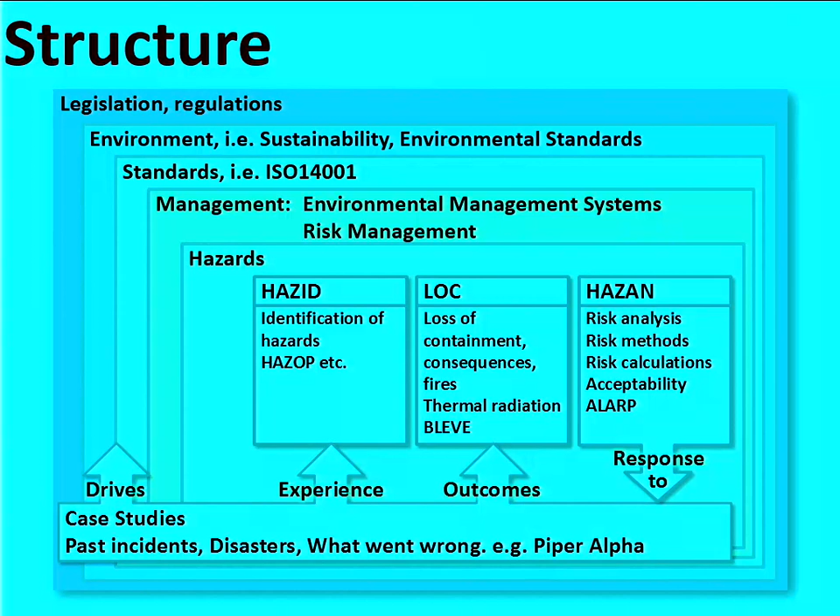Best thing we can do. So that's an overall picture of the structure of this module. The assessment: we will do an in-course assessment on HAZOP, hazard and operability. I'll give you a lecture on HAZOP. We'll then do a workshop on HAZOP. I'll put you in groups and you go away and do a HAZOP study on a little system that we have, and then we'll assess it.

The assessment for this is usually, we get the group in a room and we talk to the group for half an hour and try and see how much you understand about the HAZOP principle and what you've found in the little system that we give you, and you will get a mark for that. Don't be nervous about it, it's really quite straightforward, and most groups usually do quite well. And that's worth 20% of this module.

Then at the end of the semester you will get a 2-hour exam, and that's worth 80% of the module. Now I've got this from last year. I think Sue's got the same format this year. The exam format is you get one question at the very start which is compulsory, and then for the remaining 3 questions you just need to answer 2 out of 3. So that's the way the exam's organised. But don't worry too much about that at the moment. We'll tell you more about that when we get towards the exams at the end of this semester.

It's no big deal. Right, so that's the basic gears of the module, just to give you an idea of what it's all about. We thought it's best to give you an introduction at the very head of the module, because quite simply you have so many people that come and give you lectures, it can be quite hard to put the picture together. So what I've tried to do there with those few slides is to just give you a feel for what this module is all about. And in just one short module, it is quite comprehensive. We do quite a lot of work in it. Okay.

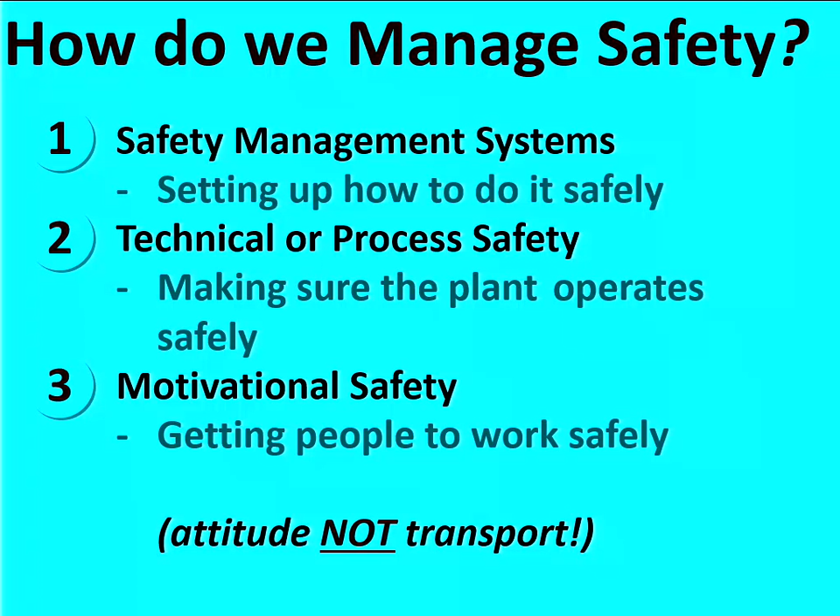It's actually getting people to think and act safe, but understand why they're doing it. They're not just ticking boxes because the boss says you've got to tick those boxes. They're ticking boxes because they understand why someone's doing it. So it's actually quite a key aspect. Fair enough, management systems, fair enough, process safety, yeah, absolutely. But also the key third part of that is the people involved. They are key. If the people involved are not doing it properly, you can have as many management systems and as many technical or process safety methods out there, they just won't be any good. You really need motivational safety as well.

So have a look at safety management first. Well, this is done from a UK point of view because that's the only one I know, but in general terms, the basic principles will apply to most countries. So if you're not from the UK or if you're not from Europe, please bear with me. Have a look at the basic way these things are done.

Now, management systems are about defining safety policy, setting the standards, targets. So you're all writing notes, that's good. I've actually put this stuff on Blackboard as well if you want to copy. So setting safety standards and targets, setting up how you do things, the methods, the procedures, the systems of work,

monitoring the effectiveness. So there's no point in just setting things up and just hoping everybody follows it. You've basically got to watch as well. So do an audit, do a check, make sure everybody's actually doing what you've said they should be doing. So compliance, monitoring, effectiveness.

And also in the UK, what we have to do, and we do it all over the place, this building included, is we meet the requirements of what's known as the Health and Safety at Work Act 1974, or HASAWA for short. I'm fortunately, or unfortunately, old enough to remember when this came in, and it was a big change. Before the Health and Safety at Work Act, there were lots of different little safety rules and everything.

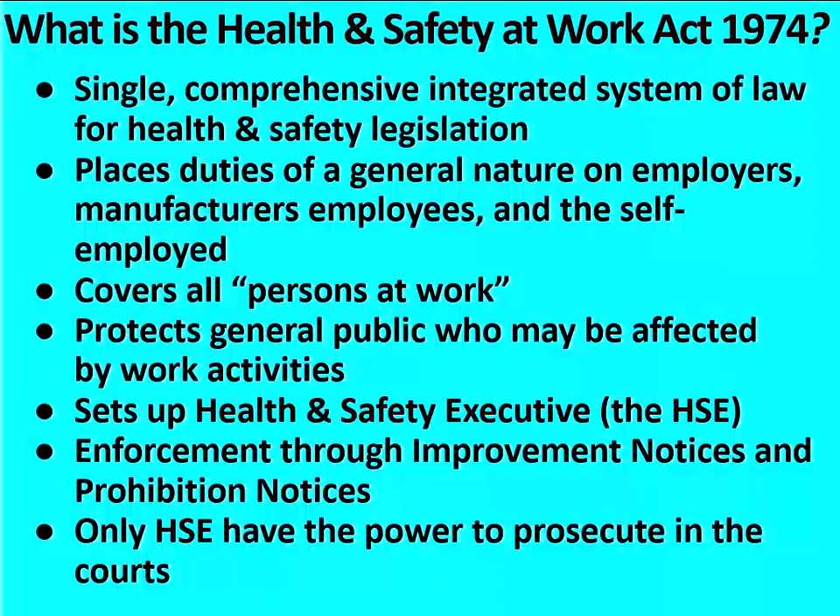So, what's the most important part of the HASAWA? Section 2. There's various sections in it; well, you know, it's a piece of legislation, so it's very big, it's very wordy, it's very difficult to read. I don't think I've read through it. But there's an important point there, and there's actually an important phrase in there as well.

It says, it shall be the duty of every employer, that's the bosses, to ensure, and then I've underlined this bit, so far as is reasonably practicable. It's important, that. The health, safety and welfare at work of all his employees. Well, it was written in 1974, they would have said his or her employees nowadays, but that's what it's doing there.

In plain English, in section 2, it's saying that it is the duty of every employer to ensure the health, safety and welfare at work of all their employees. There it is, in law. It says so far as is reasonably practicable because it understands the fact that no matter how many measures you take, there will always still be accidents, unfortunately. So it puts that practical limit in.

What you have to do as an employer, and you'll see later on as an employee, is you must take all reasonable steps to make sure. So the reason for having those words there is, okay, you can take all the reasonable steps to make sure that there's no accidents, but there will still be some accidents.

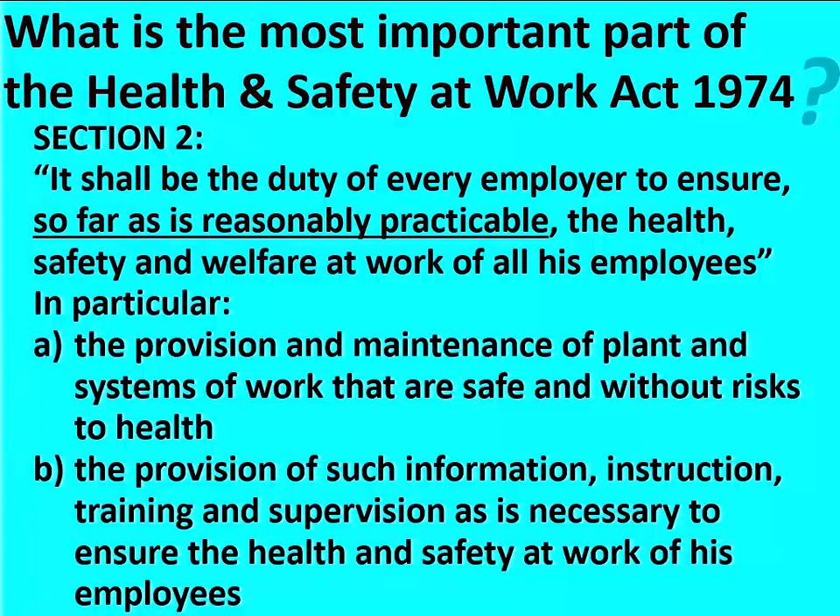So there you go, there's the slide. Should have put the slide up when I was explaining that.

So far as is reasonably practicable, it's actually an interpretation based on case law. So it says the cost of further reducing the risk must be grossly disproportionate, i.e. out of proportion to the risk itself. So how far do you go to get rid of risk? As long as you've taken reasonable steps, that's acceptable. But if it becomes disproportionate, well, you drive everybody out of business, so there'd be no point to it.

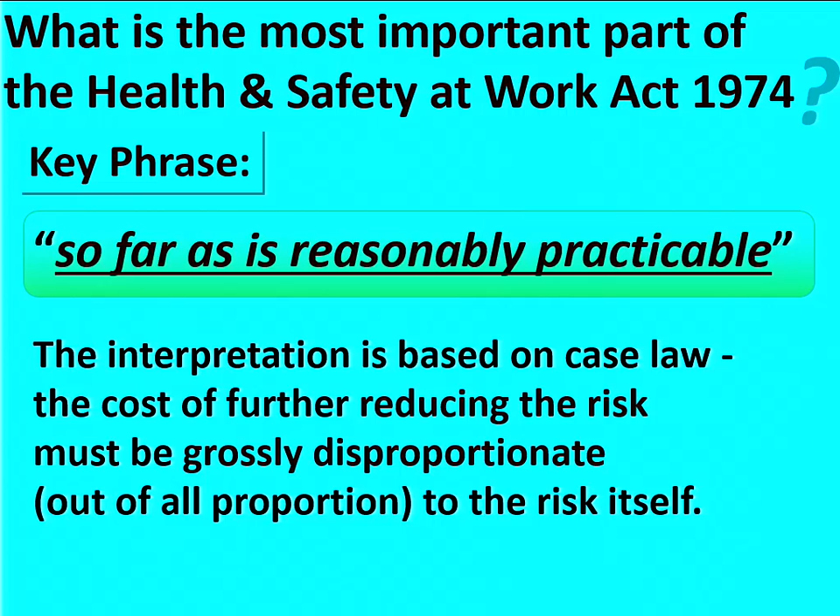What is ALARP? Now this crops up on a regular basis in all safety, all aspects of safety. And it's actually got its own acronym now, ALARP. And what it stands for is as low as reasonably practicable. And that's quite an important one to understand. Right? As low as reasonably practicable.

And the concept of reasonably practicable lies at the heart of the British health and safety system, and of course it's a key part of the general duties of health and safety at work. So what it means is that a risk has been reduced ALARP, as low as reasonably practicable. It's about weighing the risk against the sacrifice needed to further reduce it.

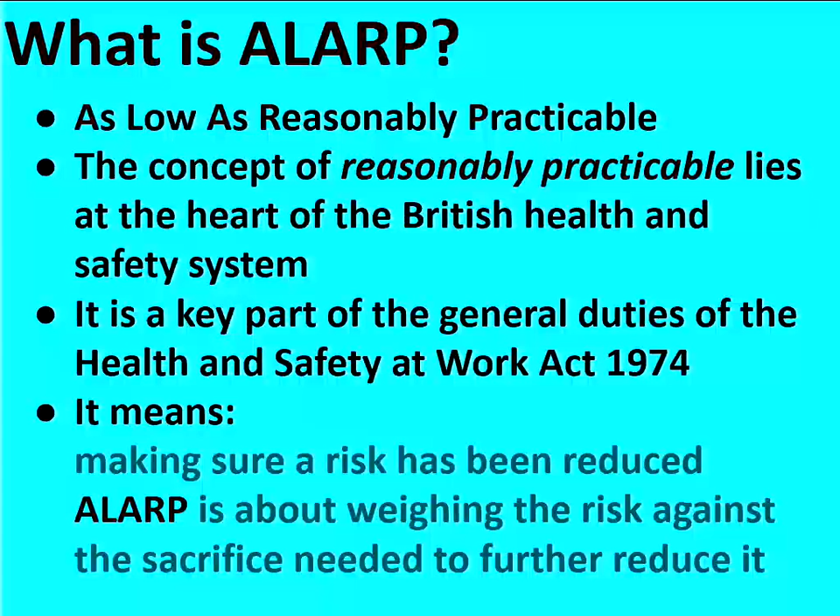So this is what I've said, I'll say it for a third time. You've taken all reasonable steps to reduce risk, and you've actually pushed it as far as you can, but the next step would just be impracticable. And as long as you can prove that to the HSE, you've done your duty.

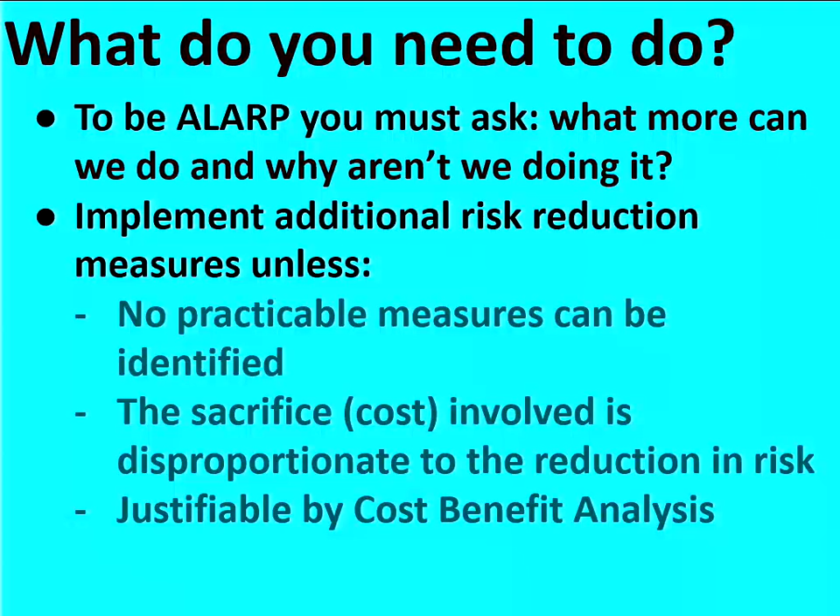Okay, management of safety. Technical or process safety. Well, like I mentioned before, LOC, loss of containment, is usually the core reason for any incident. So this technical or process safety is involved in preventing plants from releasing their hazardous contents. And you do that by good design, good construction, and good operation.

You must also understand how potential major accidents can happen, and if they do, what the consequences are going to be. Now, any really good person who's well into this sort of thing should know how major accidents occur. And if a major accident does occur, what's going to happen? If you don't do that, you shouldn't really be in charge of heavy machinery, should you?

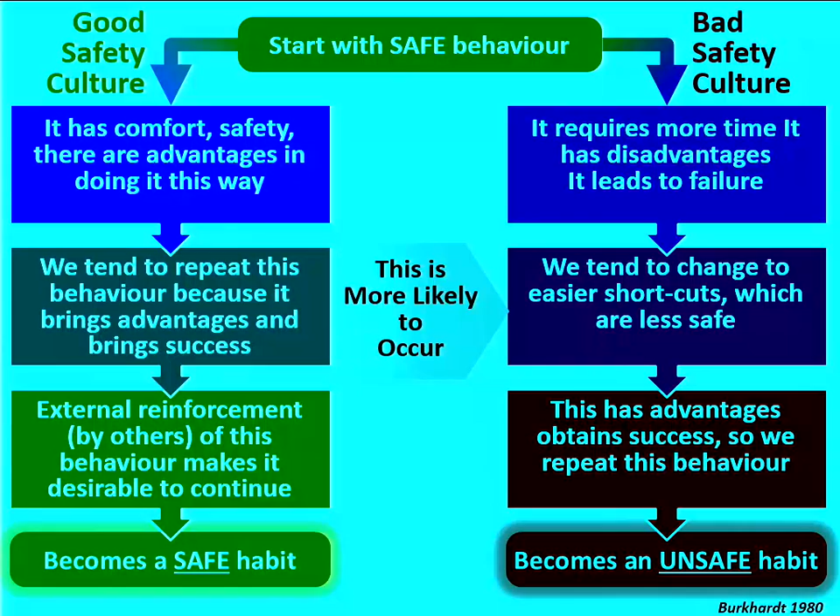Something happens, you think, goodness, yeah, there was an explosion, but I was going to walk past there. If I'd been there as the explosion happened, I would have been killed. I feel really, really nasty about that. You know, I don't feel good about it.

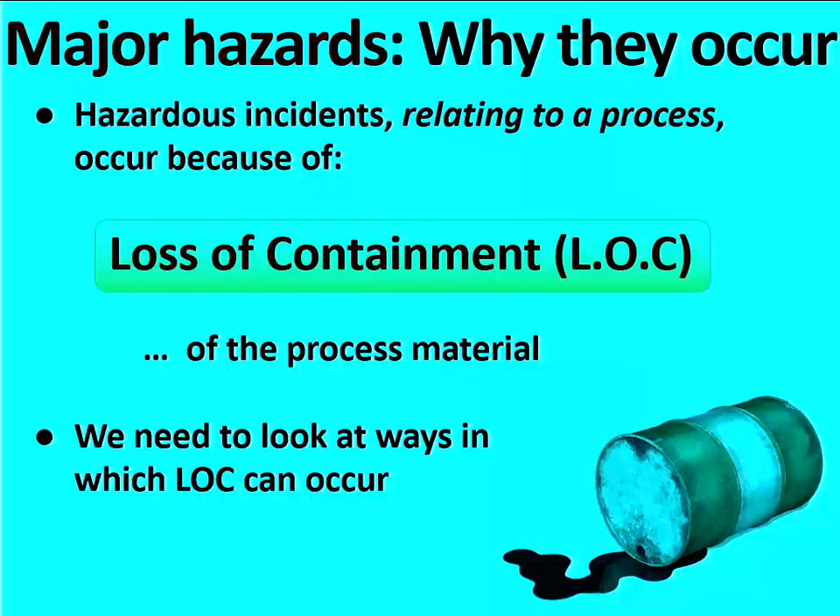And an awful lot of major accidents, in fact almost all of them that I can think of, occur because some substance wasn't where it was supposed to be. It's as simple as that. Loss of containment. So you need to look at ways in which LOC can occur. So one of the consequences of LOC can be, well, you've got tons of flammable or toxic liquid under pressure and at high temperature, exploding, not being where it's supposed to be, and the consequences of this are typically

things like harm to people outside the factory, the public, which you can't do now. It's against the law. Harm to employees, so if you're an engineer working there, that's you. Damage to the plant. When you're working with engineering equipment, then you are in charge of very expensive, hundreds of millions of pounds worth of equipment. You're responsible for it. It's owned by the company, which is owned by the shareholders. You are responsible for that equipment, so it's your duty to make sure it's operated properly and you don't damage it.

Loss of production. Quite a lot of people in industry are involved in actually producing something. At the end of the day, there's a product. And that product is the profit that pays your wages, and the company and the shareholders as well. So really, money comes into it as well. After harm to people, of course. Harm to the environment. And bad publicity. Sounds like a bad joke, doesn't it? But if you have a major accident on your plant, the bad publicity alone can cause untold damage to your company and your job in turn as well, of course.

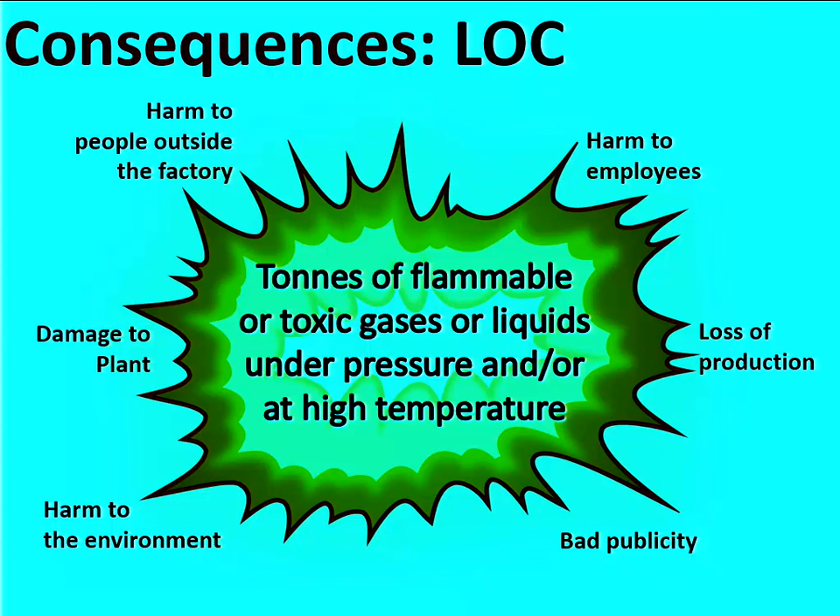So there's three main effects. Release of material can lead to all three of these basically: fire, explosion, toxic release. Nothing you really want. I'll actually show you some films of various things like this going on. There's 5 main mechanisms for release. 1, vessel or pipe bursts. 2, vessel or pipes weakened to failure. 3, you get leaks and releases from a weakened containment envelope, pressure vessels, things like that, or pumps, heat exchangers.

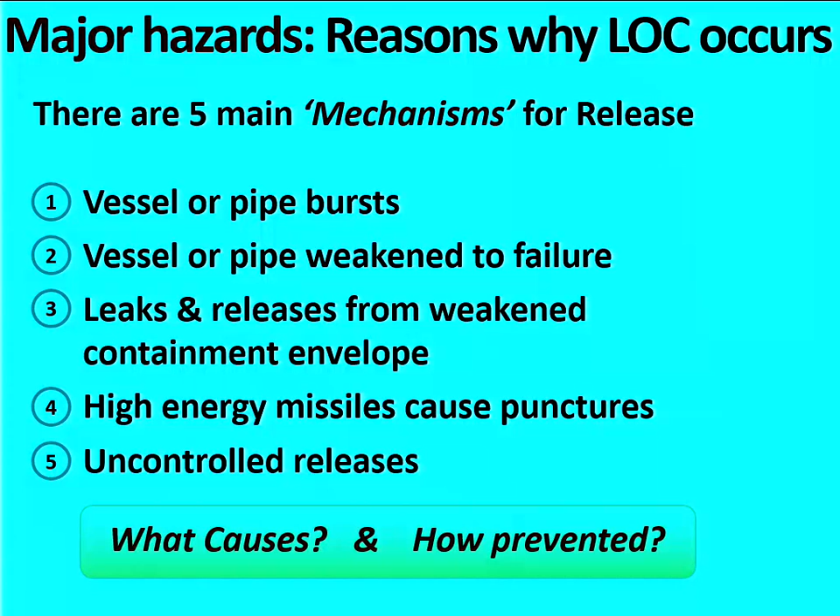High energy missiles cause further punctures, part of the domino effect. If you have a major loss of containment, for example, you will get lots of metal flying all over the place, and it causes punctures of surrounding equipment and uncontrolled releases. So we'll have a look through the causes and how they're prevented for all 5 of them, and then we'll call it a day for today. So, bursts, ruptures, etc.

So we're looking at bursts of a vessel or a pipeline caused by internal explosion, overpressure, runaway reaction, where you've got the wrong chemicals in something and they react with each other and you get an exothermic reaction, or decomposition. And these are prevented by proper control of your reaction, your operation, that sort of thing. Good design and operation, good protective systems, so they're well equipped with relief valves, bursting discs, vents. You've got good trip systems or interlocks, which prevent all those things from happening.

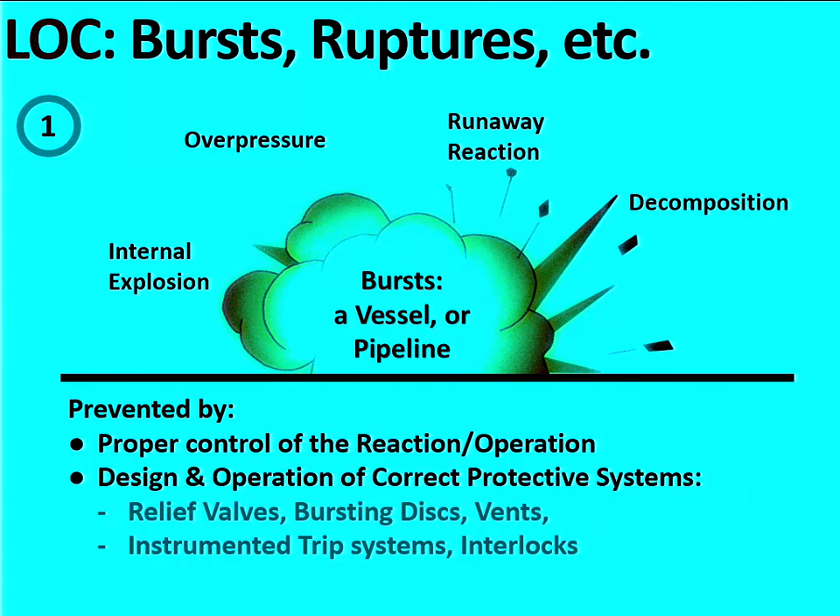Vessel weakens until it fails. Well, you've got various things applying to that. You've got corrosion, a big one in pipelines, I suppose. Creep, embrittlement, all material properties, especially cracking, stress corrosion cracking, things like that.

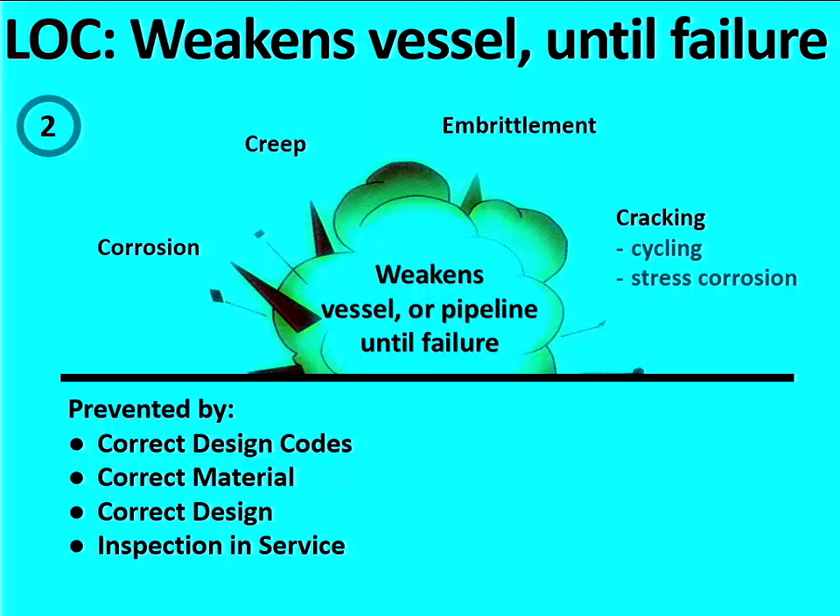Now these are usually prevented by good design codes. That's the first step. If you design to the code or the standard, then that's a good way to do it. Good material choice, good design. If you've got a corrosion problem, maybe a cathodic protection system or something like that. And of course, regular inspection of the equipment. That's what I do.

Right, weakened vessel. Why would a vessel be weak? Incorrect assembly, this happens. Something's apart for maintenance and it's not put back together again properly. When you put it back online, you can get a leak from it. Poor maintenance. If you operate things outside the design envelope, so you're operating them for something they weren't actually designed for, that can lead to leaks and releases.

Bad modifications. Somebody's had a good idea, we'll stick this valve on here and this pipe on here, that should work. Quite often it doesn't, because it hasn't been properly thought out. In fact, there's a whole science in safety now called management of change. So if you make any changes to a plant, you have to go through a set of routines to see if you actually change the hazard and risk applied to that plant. So bad modifications, treat with a lot of care.

And of course wrong materials, well that's the designer's problem. But that could also be designed outside the envelope. The designer designed a reactor to contain a particular material, and you used a different material, then you might get this sort of problem. So this is prevented by proper management of operations and good maintenance policies, and includes things such as management of change as well, of course.

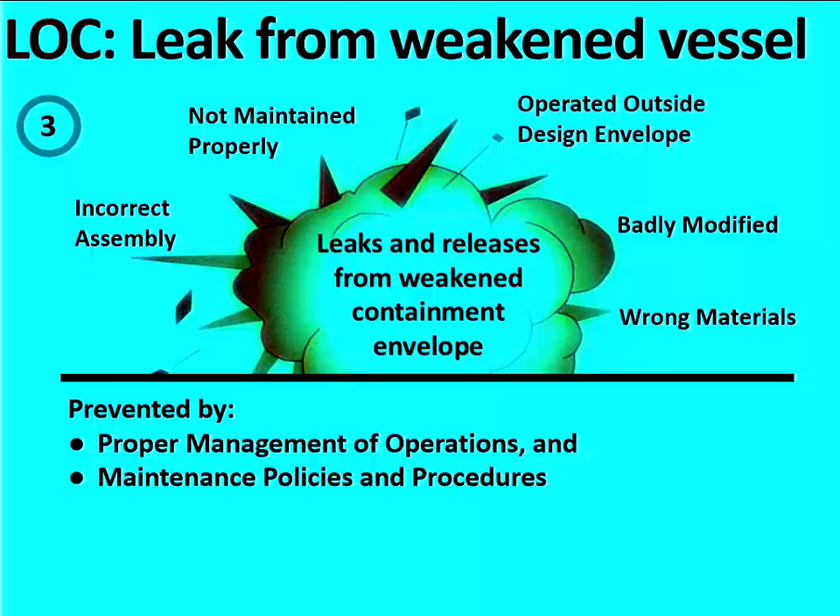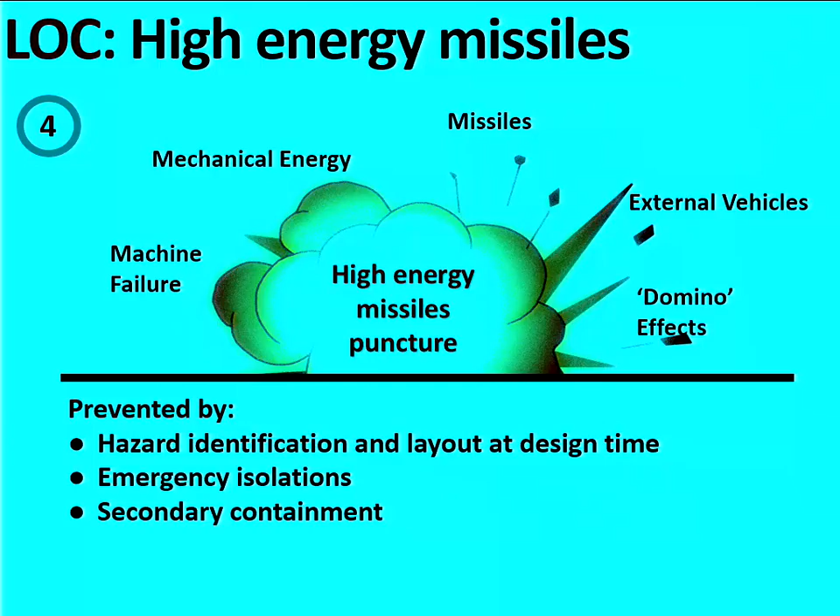If you understand the consequence, and you could get high energy missiles flying all over the place, then you might have to put concrete bunds around something. Well, that's a last resort these days.

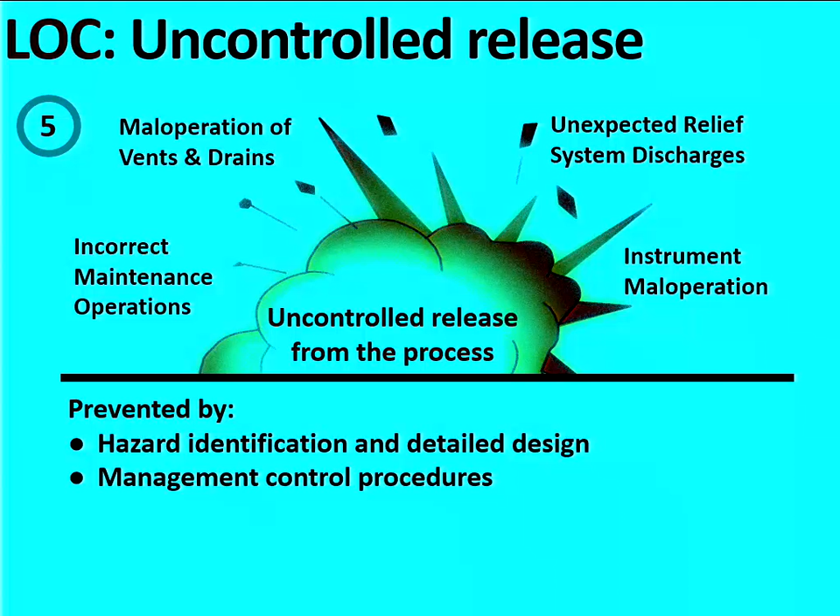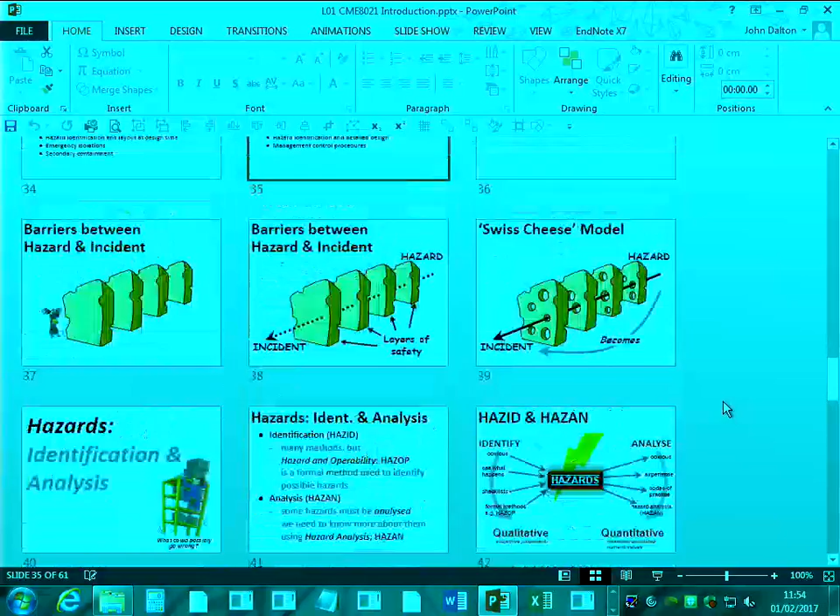My hour's up. There are various other slides on there. Like I said, I've put this on Blackboard. I do not have the time to go through this today. There's some information there about some of the case studies, and there is actually a slide there on the Bhopal incident as well. But I can put some more stuff on Blackboard if you want.